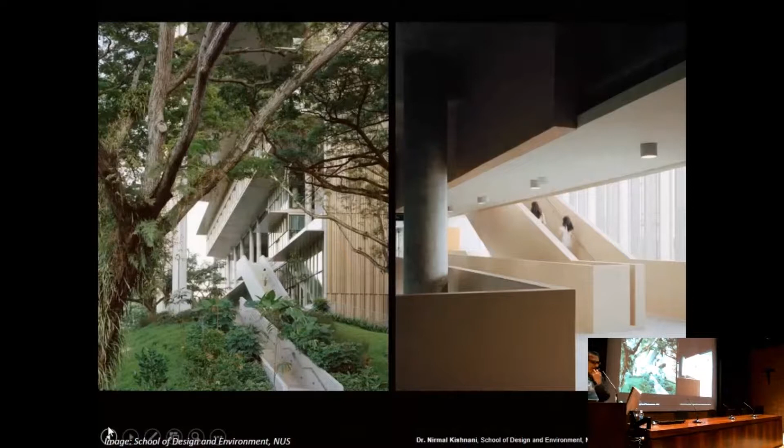There are not many net zero buildings in Asia. There is one other building in Singapore which is net zero, but that building was a retrofit. This was the first new building that was aiming to be net zero.

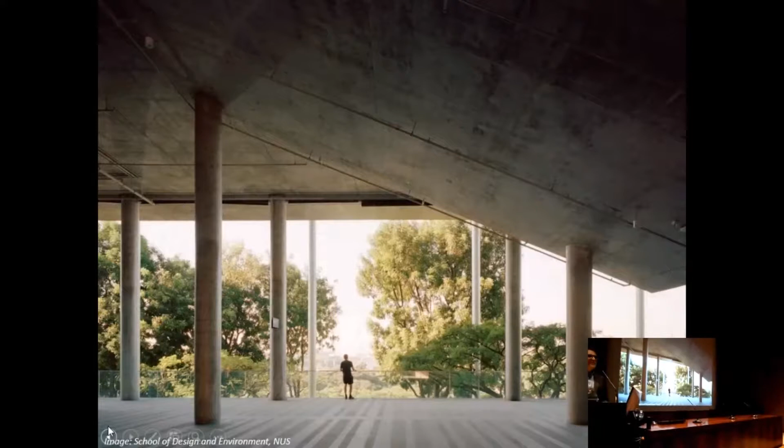If you know the tropical climate, you know a big part of the problem is creating conditions of comfort. In fact, more than 60% of energy used by buildings in the tropics, at least in Singapore and Southeast Asia, goes to air conditioning. So the challenge was how to create comfort without using excessive energy. But the second question was how do we create the energy on site, what technology do we have, and how do we integrate that technology into the architecture of the project?

I have to say I'm very proud of this, not because it's net zero. I think that's a nice thing, but because we were able to achieve something quite remarkable from an architectural standpoint.

I will show you more images as we go along, but here, just to give you context, this is the university campus, the National University of Singapore on the west of Singapore. And there in blue is the School of Design and Environment, and the red block is the new building that we have created.

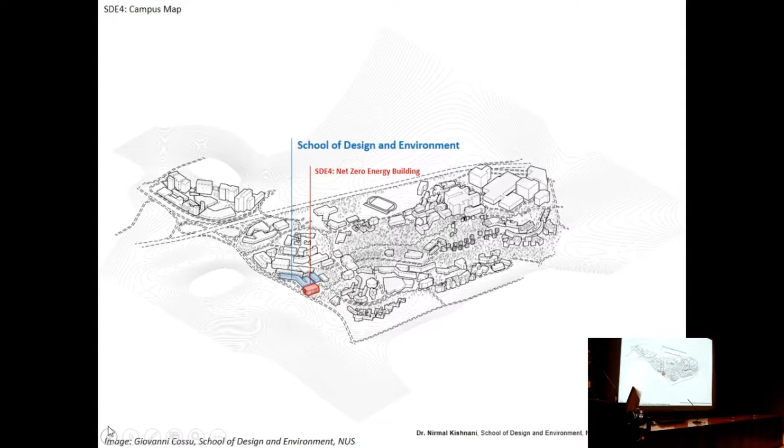I like to joke that nothing frightens a school of architecture more than to ask them to make their own building, because everything that we teach must be in the building. It must represent all our aspirations. So when the project started, it was very stressful because we had to pack a lot into this project.

It had to do many things at many levels. I think this is what made it so complex, because we wanted it to be zero energy, but we also wanted it to be beautiful and comfortable and inclusive and biophilic. All of these things that we teach in the School of Architecture, we needed to represent in this project.

So here is a very quick summary. It's not a very big building, about 8,500 square meters on 6 levels, and most of it is architectural studios, design studios, laboratories, some classrooms, and a lot of social space.

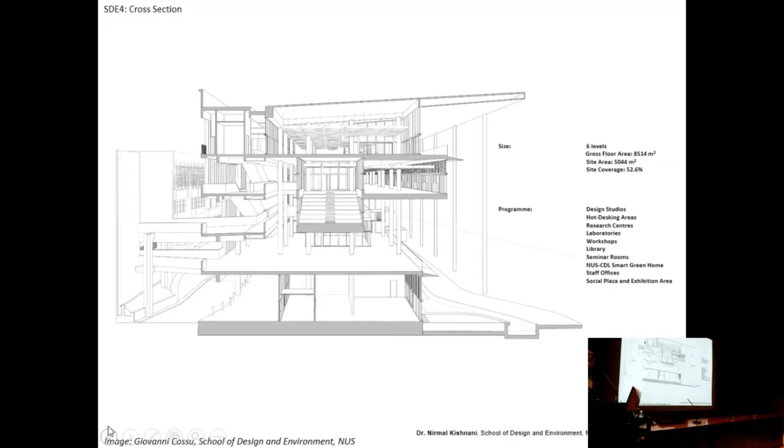I hope you will bear with me, because I have a short video, and sometimes I think it's better to see it in video than me just talking about it with images. So I will run a very short video on the completion of the building. This was used when we launched the project.

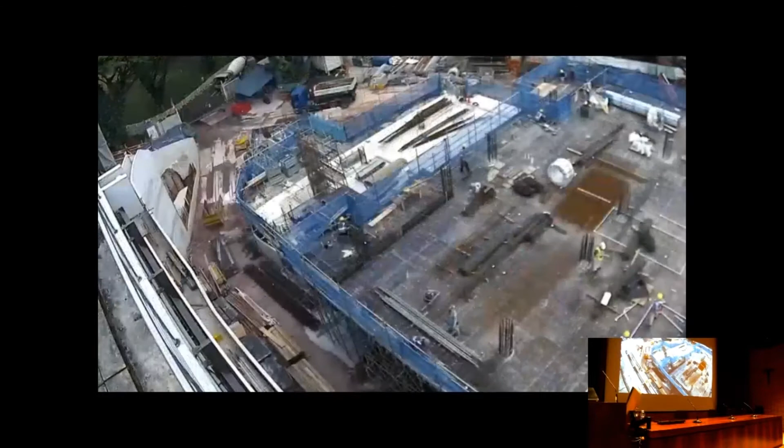I think as an academic institution, and particularly in the School of Design and Environment, it is really incumbent on us to walk the talk. We need to continuously position ourselves in advance of the current state. That's our mission as an institution, to continue to push the frontier, to research and development of even higher ideals and higher aspirations.

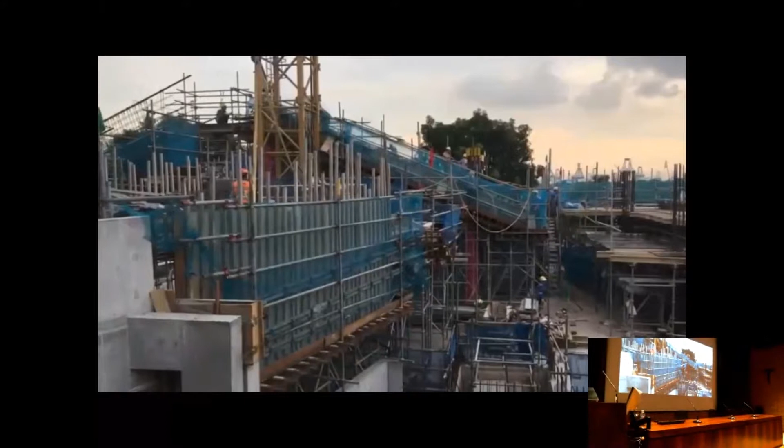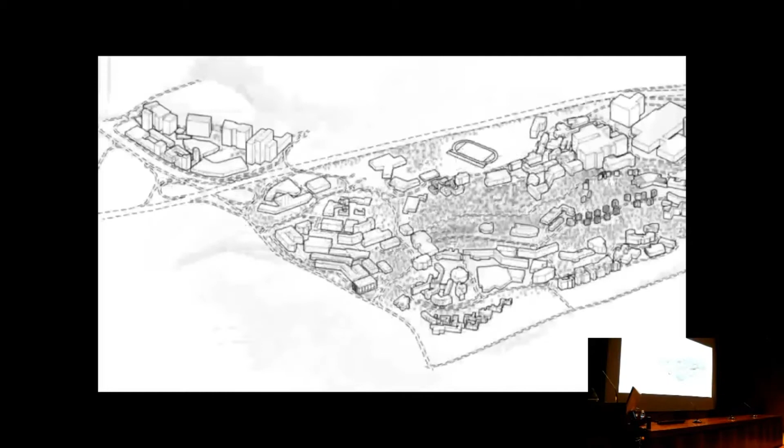In the campus master plans completed in 2008 and 2012, the then President decided that each faculty should have a new flagship building that will inspire the occupants to continue to excel in teaching and research activities in an increasingly competitive academic landscape.

We needed a building that would encapsulate the challenges of our time. Sustainability had become an important part of what we teach. The architecture of the school needed to match the pedagogy of the school. If this was done right, it would not only add credibility to what we teach, it would allow the use of the building as a teaching aid and research scaffold.

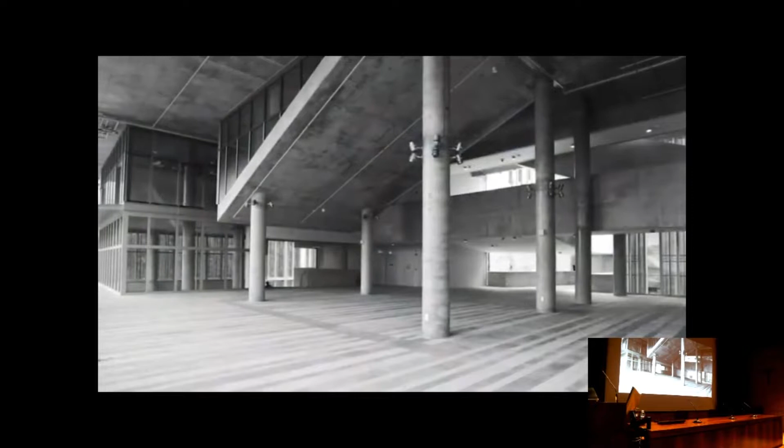The values of SDE are twofold. One, for SDE itself as an educational institution, is really to set a precedent, an aspiration for all of our students in terms of performance, but also architectural formal clarity. This sets a tone in which we as educators teach our students, and it becomes a way of showing immediately to our students the values that we have as a school.

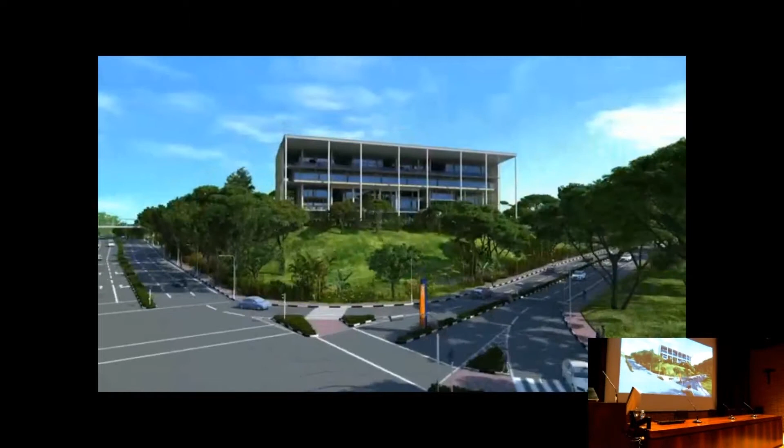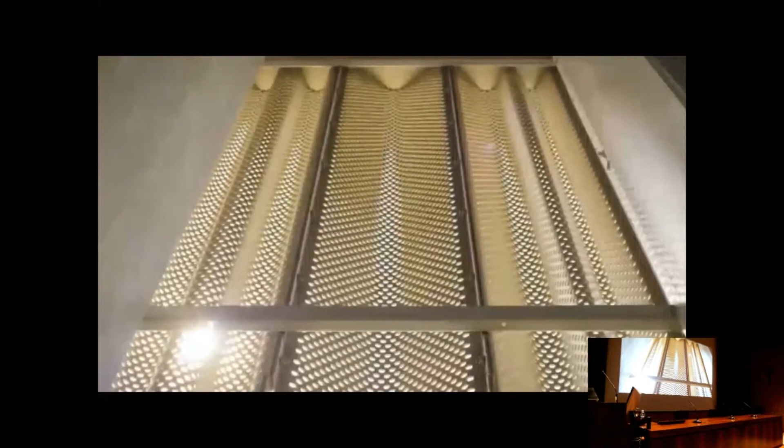First of all, having a building that looks very tropical, I think it will make a very handsome entrance building to the university. All this will be achieved with good architecture without compromising the sense of space, the beautiful proportions, the combination, the articulation of the materials, the details. Different spaces have a certain informality and generosity that the spaces provide.

So there's a lot of breakout space, interpenetration of workspace as well as collaborative space, learning space, and research space, so that it cultivates a sense of collaborative work or collaborative learning within students. The veracity of this parti, I think, is pretty fantastic. The south elevation is framed by a colonnade that supports the large PV panel above, and in a way it really speaks to the kind of amazing integration between the natural environment, the outdoor climate, and interior spaces.

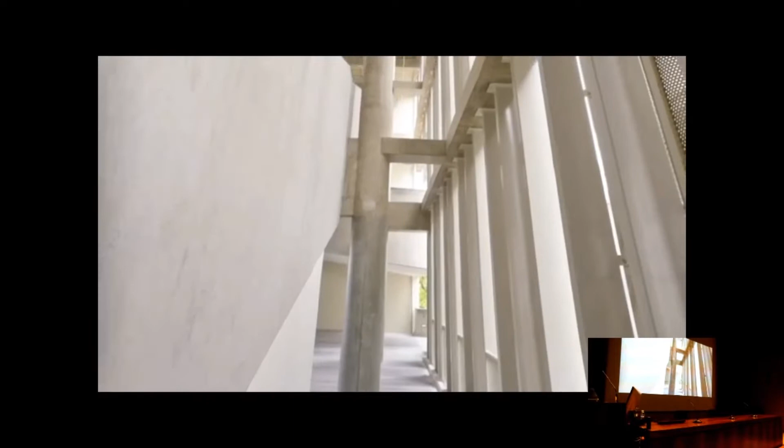This project has preserved a sense of lightness and space, and interestingly, this ambiguity between the indoor and outdoor space was even visible during construction, for example, in the way the building structure and scaffolding encapsulated the existing trees.

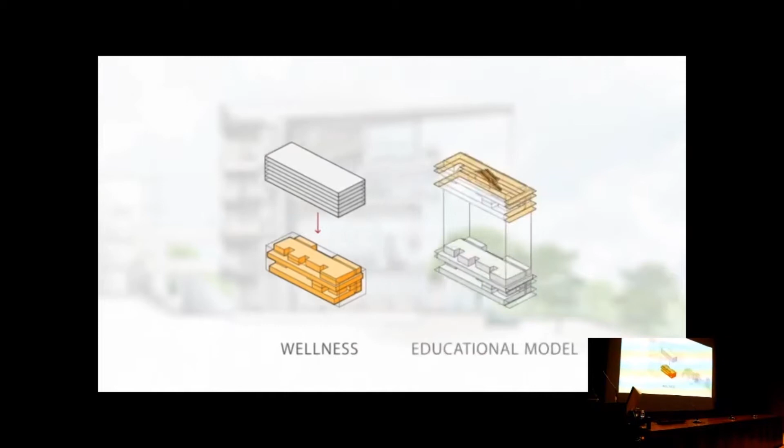In architecture, the building is only as good as the client as well as the architect. So both had to be pushed by the brief, in which the vision was very clear—to look at environmental performance and environmental sustainability in a very serious way. I think the coupling of a clear vision and technical performance really paved

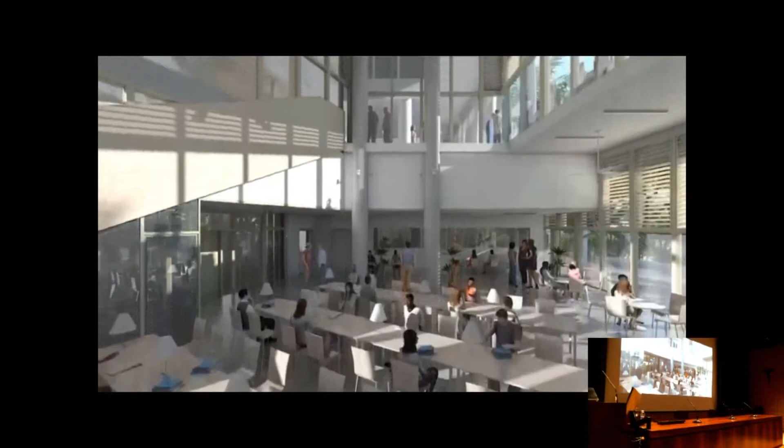the way and guided our architectural response in a very productive way. This building is going to be very different from the rest of the buildings in NUS—a different type of mechanical system, ceiling fans, and the way the building operates will be very different. We will have to engage a lot of training for the users to educate them on how to use the systems and the building.

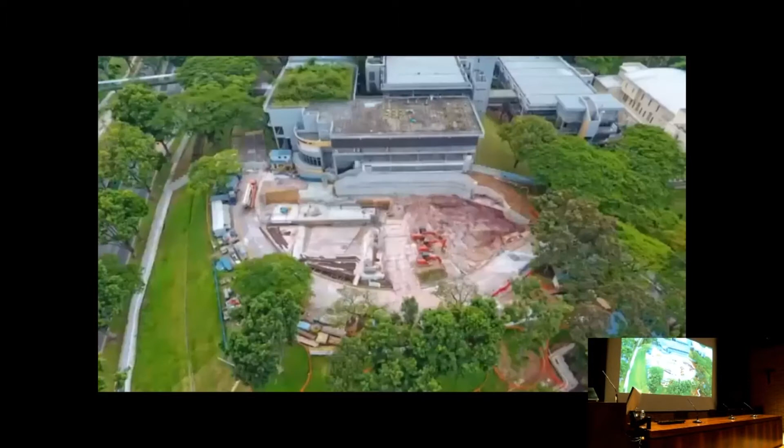SDE4, in fact, being a net zero energy building, is attracting a lot of attention. It's a showcase for NUS. After the project completed, a lot of agencies and other institutions wanted to learn from NUS how we really achieve a net zero energy building.

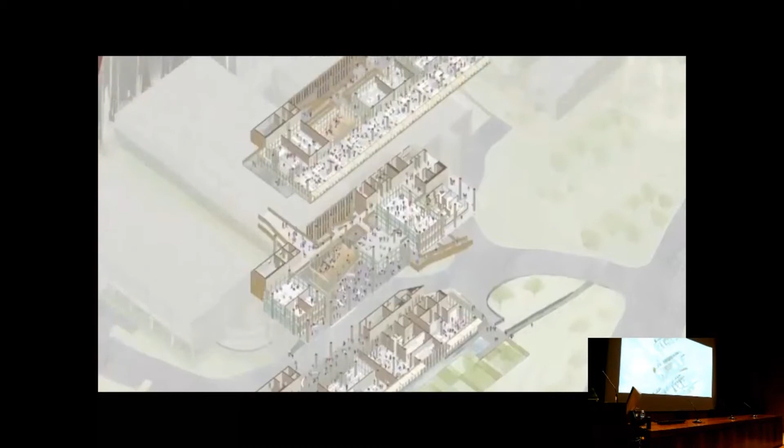To design a net zero energy building is particularly interesting for me, but in particular for Singapore and for the School of Design, I think it's key. There's a generation of students going through this school in the next 25 years, and this is where we will learn. If this building can teach just a small group of people how to help out in the environmental aspect, and they disseminate that down to the people at large, back home and back to society, then SDE4 is a fantastic building to start with.

I think it also reflects what we have learned as a team along the way. One of the key learning points would be that of sharing knowledge and developing a pragmatic understanding of design principles and systems across disciplines.

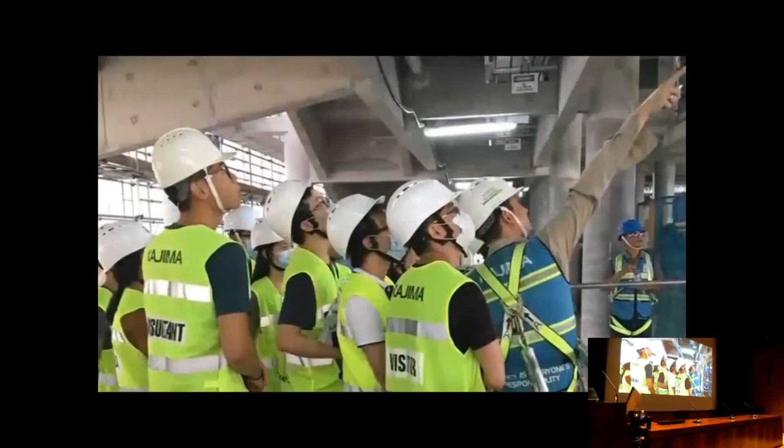But the project went even beyond this target, looking at opportunities for pedagogy. This whole idea of integrating design, construction, teaching, and research was translated, for example, in seminars, workshops, and site visits with SDE students and staff, and even in signing a memorandum of understanding with SDE partners, and introductory sessions with delegations and embassies. The entire process became pedagogical.

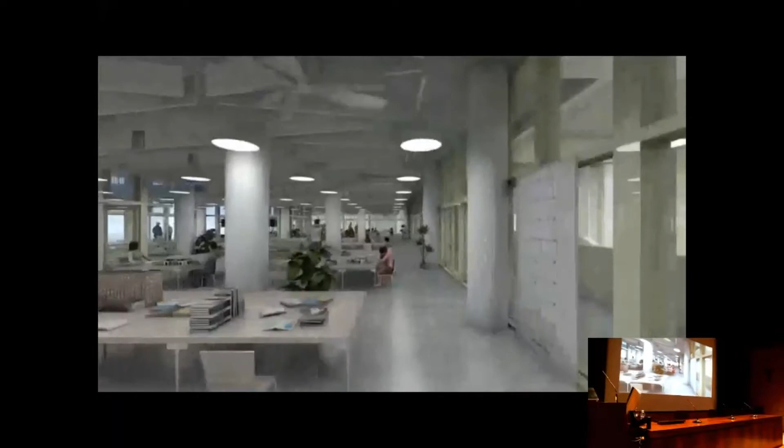All this was a very clear and important message, particularly for our School of Design and Environment. That's why we are doing what we're doing—so that students get the opportunity to experience firsthand what it is like to engage in such a process: to design, develop, construct, and operate a state-of-the-art building that supports wellness and green living. At the same time, they themselves must also be influenced to adapt their own behavior in living inside such a building.

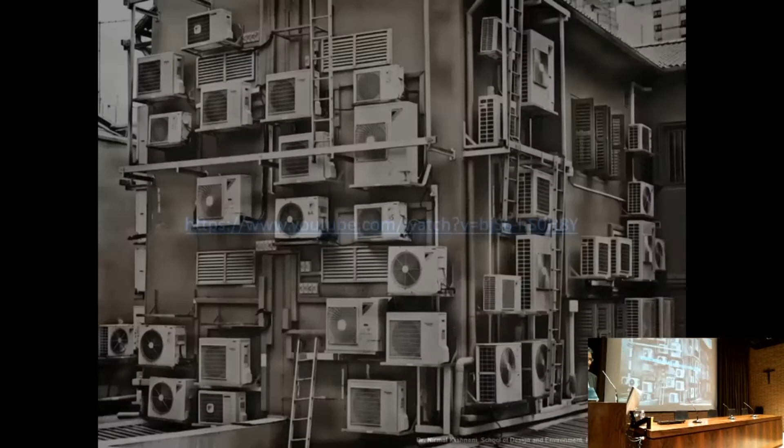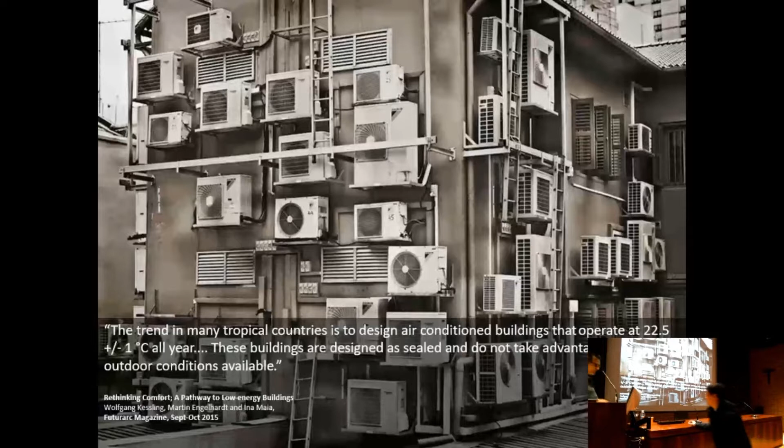I apologize for the PR. It sounds like... I think I'll get the video. Sorry, I think it's running. That has nothing to do with the new building.

The video was produced as a way of promoting the ideas of the school to audiences. So let me take you through step by step how we got to this project, and it was a very difficult process.

Of course, when you finish a project, you explain it like it was natural—of course we're going to make a net zero building because we are a school. But actually it took a long time, and it was very hard work. The biggest challenge was really redefining comfort and redefining how we function as a school of design. Let me take a little time to walk you through step by step how we got there.

The challenge of the tropics is that we have become addicted to air conditioning. It's not that we cannot function without it, but as a matter of lifestyle choice, we've become so used to it that we don't know how to imagine a world without it. This is a photograph of a beautiful old historical district in Singapore, which if you come to Singapore you must visit, because it's so charming—it's like a precinct of old shop houses.

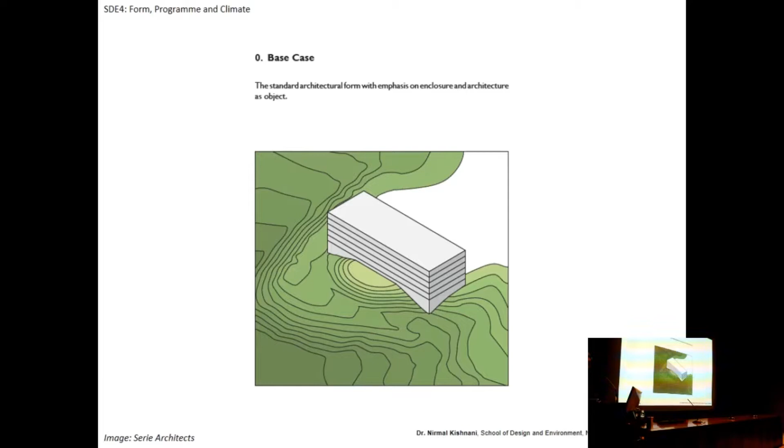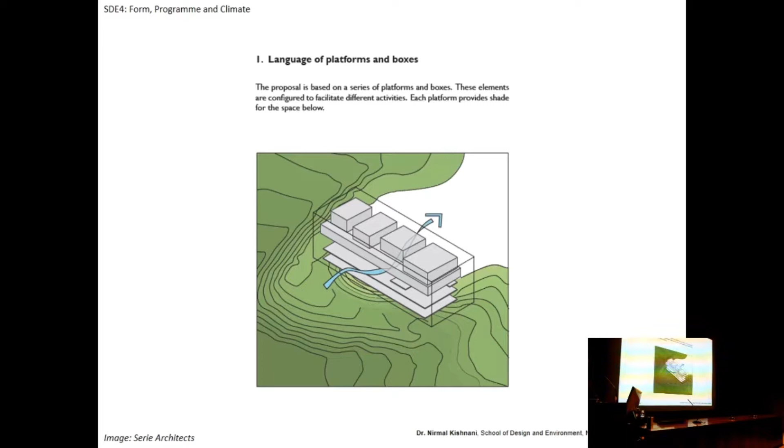They argued that the base case of the building is that it must have the right orientation, but it cannot be a compact solid object which internalizes all its air conditioning systems. It needed porosity. So the architectural language proposed was that of platforms and boxes. The building would function the way it looks: you have these floors, and within that you have boxes, with gaps between them through which air flows. This logic was there from the beginning, and it stayed there.

And Chris, who you saw in the video, he's an excellent designer. I have great respect for him. He was able to hold on to this ideal.

The basic premise is this: you can air condition where it's needed, but in spaces where it's not absolutely needed, perhaps air conditioning is not the answer. So the building is designed as a mix of spaces, those that are climate controlled and those that are naturally ventilated, porous, and connected to the outdoors.

A bit draconian, like okay, now the aircon goes off, open the windows and switch on the fans. You don't have a choice. This is something we have to communicate to the student body and educate them on why it's necessary, because when people believe in the bigger idea of what you're trying to do, they are prepared psychologically to accept certain levels of discomfort, or prepared to accept alternative modes of comfort, meaning they don't demand air conditioning all the time.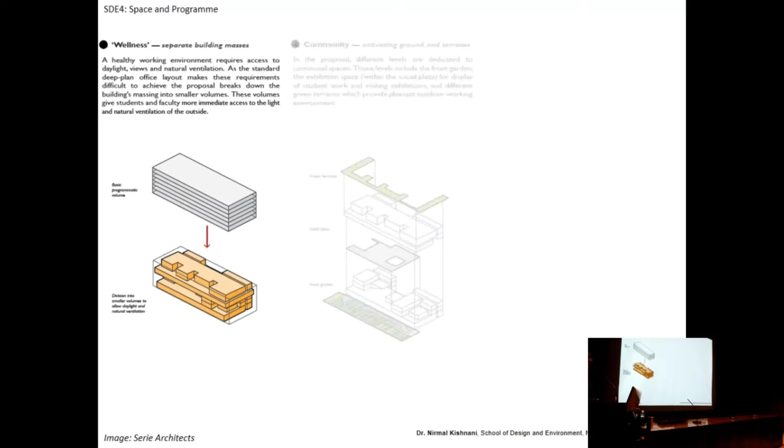But what we decided very early on is that we were going to challenge that. We were not going to fully air condition the building, but also we were going to fragment the form. By fragmenting it, we were able to free the space for natural ventilation and for social space. So the community intention, the idea that a building like this is not simply functional spaces but also spaces where we socially interact with each other, became clear very early at the beginning.

They had to build a scaffold to wrap around the tree so that they could do the construction around it. But these are the kinds of spaces that students will enjoy—spill-out spaces from the studio where they can go out and have their meals.

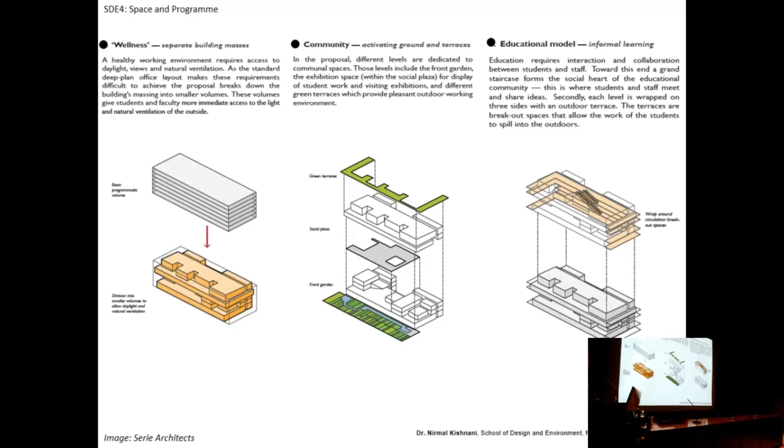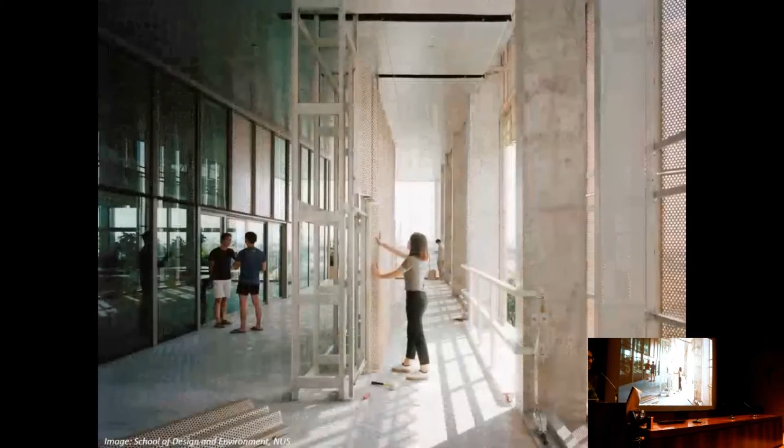Or they can use these spaces for some of the more messy work that architects do, like spraying and so on. Then the second layer of thinking, of space-making, was the space that would create opportunities for learning and research. We knew early on that the building shouldn't just be an object—it should be a scaffold, meaning you should be able to take away things from it and add things to it.

So here you see a part of the facade that is meant to be removed. If you are a researcher working with the School of Design and Environment and you want to study solar panels, new technology, or green facade systems, you can simply take off a part of the wall and attach your research elements there, and get data.

So the idea of a living laboratory was also there from the beginning. It was part of the vision statement that we need to have spaces that teach us not just what to do now, but what to do in the future.

And these spaces also begin to behave socially. So all the corridors and the staircases are exaggerated—they're not just for circulation, but also spaces for students to hang out and interact with each other.

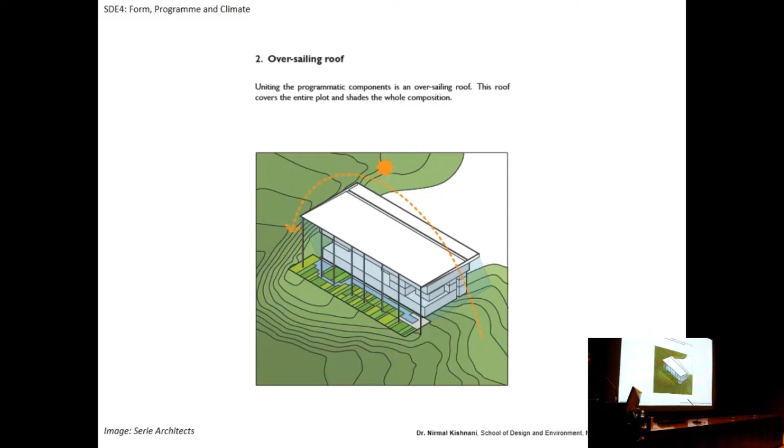The idea of a climatic response found its way into the shape of the roof, and the roof began to act as a canopy that would define the performance of the building.

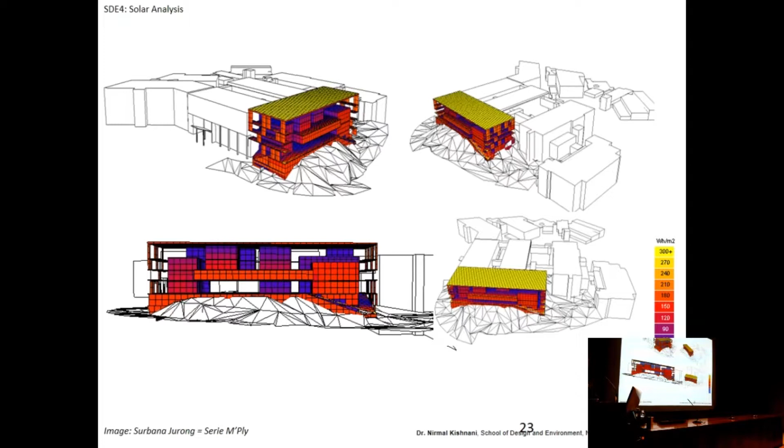Here are some of the early studies done on the facade of the building, before we extended the roof. You can see that the language of solids and voids creates a highly differentiated facade system in terms of solar exposure. This was submitted during the competition, where the architects were already looking at shielding the facade from direct solar radiation and relying on diffuse light.

I want to point out the image on the right that was proposed by the architect at the beginning—it looks like something Le Corbusier would design. It's so minimalist, so clean. The final thing was very different.

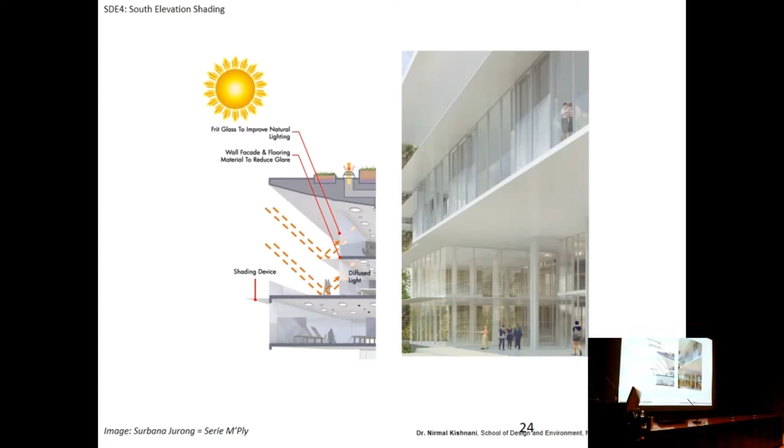It goes through a process where you begin with this idealistic image of what architecture is—no indentation, nothing. Then as you go along and learn from performance modeling, it begins to change, it transforms itself. Here are the south and north facades showing what that exposure looks like.

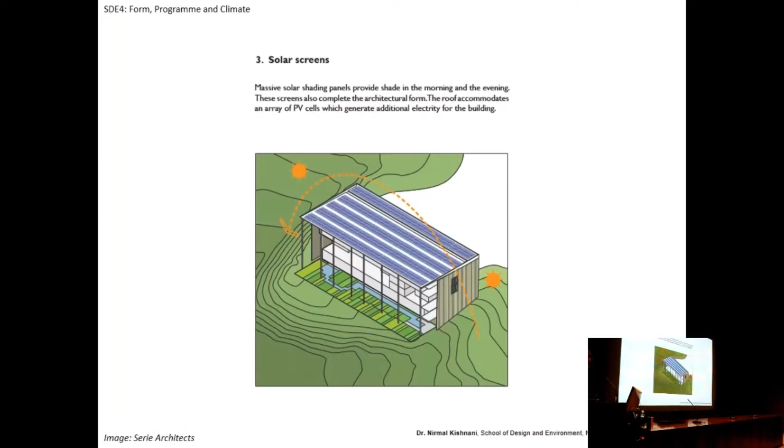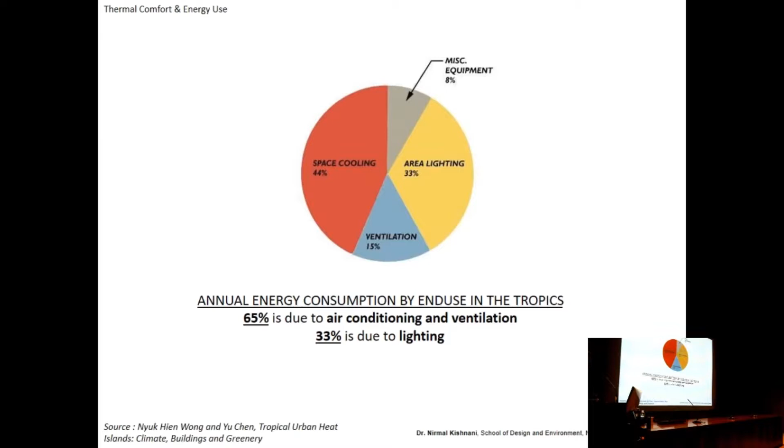And then, of course, we had to protect the east and west facades, made up of solar screens that protect the more exposed facades from sunlight. As I said, in the tropics the big problem is that we consume a lot of energy due to air conditioning, and we knew this would be a problem.

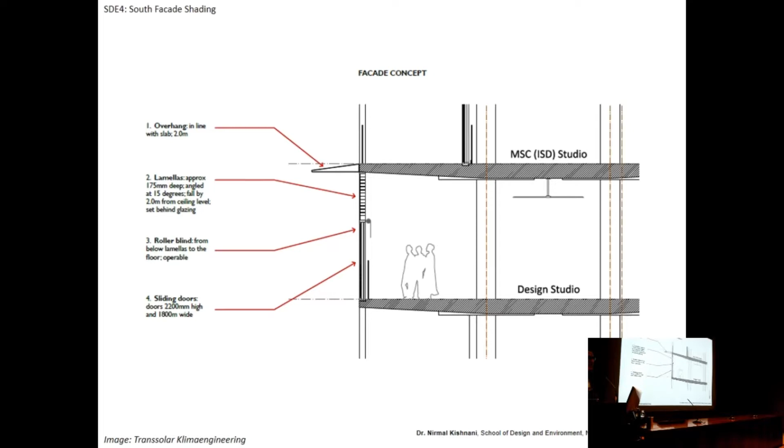Our consultant Wolfgang, from Transsolar, who was in the video, guided us through a series of steps. He said, here we have the reference building—what if we improve the envelope and reduce the solar exposure, what happens to that? Here are some designs produced by Transsolar in detail, both in terms of shading elements and lamellas to bring diffuse light in.

Here are some of the studies they did during the design process. It was a very intense process where we looked at many iterations and options. For example, they showed us for different facade systems—with different overhangs, different types of shading options, different glass properties—what the resulting cooling demand would be.

So they produced a matrix, an iterative study looking at all these different options. Green is good, red is bad, just to give you a quick idea. From this, we began to select both the extent of the overhangs, but also the type of glass and the composition of the facade.

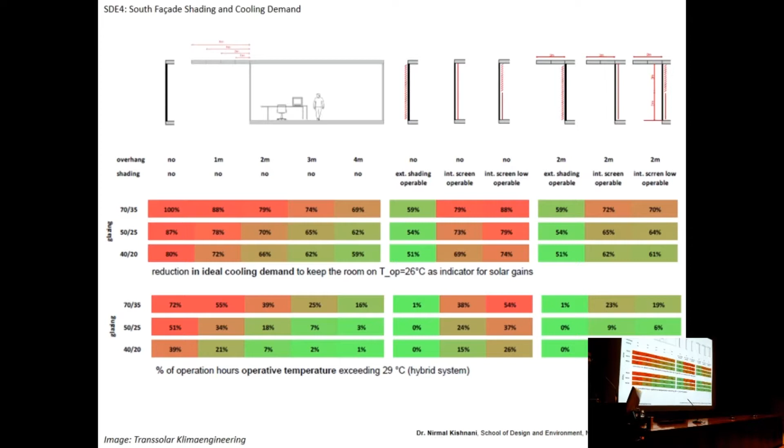So from an initial 100% energy scenario, we found that by using strategic shading systems and glass selection, we were able to reduce that by 25%.

I think it makes it more interesting that the facade tells the story of the climate. When you look at elements of the facade like these fins and lamellas, you begin to understand what the building is doing. The form and the vocabulary of the building is beginning to talk about where it is in the world.

I'm not sure this necessarily says tropical. Chris is a really good architect, but he began the process with a rather temperate idea in mind, a very Corbusian idea of planes and clear full-height glass systems, and that had to be changed.

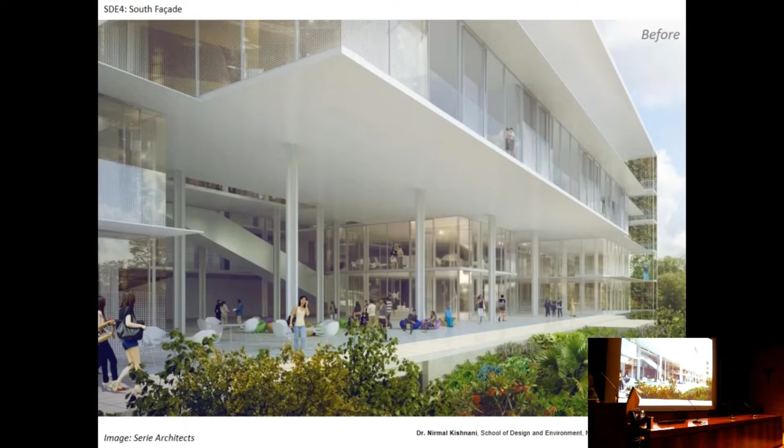And I think to his credit, every time we began to do these performance studies, he began to incorporate it into his thinking, and the architecture became more interesting, not less interesting. He didn't see it as a compromise, he saw it as a way of deepening the connection between building and place. So this is what we got at the end.

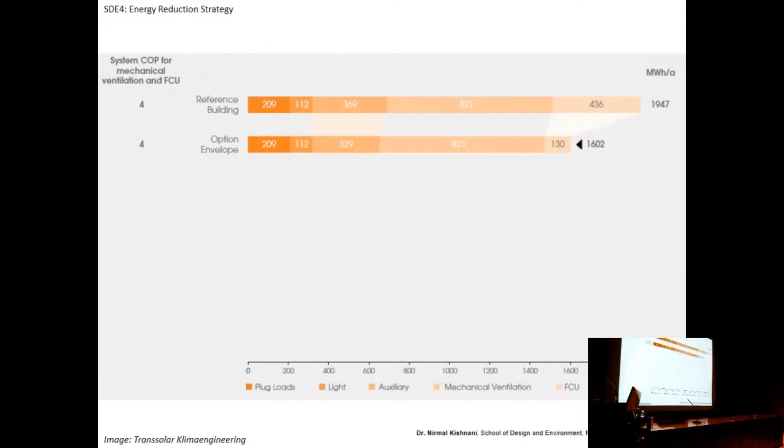And then we said, okay, 75%, still too much. What else can we do? We studied the possibility of using very efficient air conditioning systems. But the other possibility, even deeper than just efficiency of chillers, was what was called the hybrid cooling system. The hybrid cooling system works like this.

Instead of having fully cooled space with 23 degree set points, the cool air supplied is tempered, meaning it's not highly cooled. It brings the air temperature to 27, 26 degrees centigrade. This is combined with ceiling fans, and ceiling fans provide air speeds of between 0.5 to 1 meters per second, with a grid of ceiling fans over the entire space.

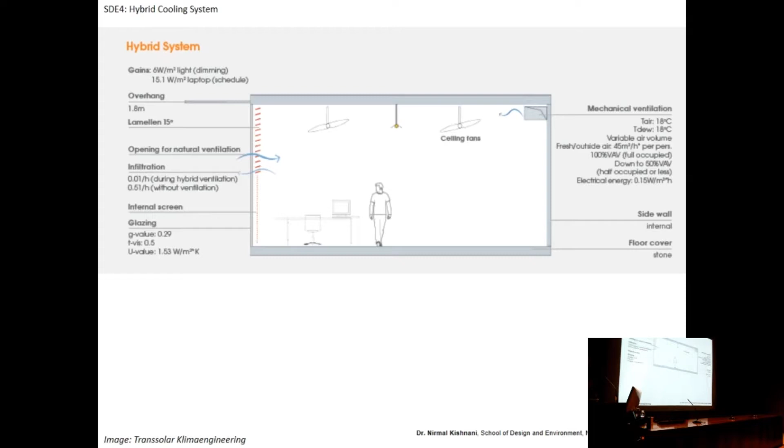So the combination of air movement and cool air provides an operative condition, the thermal sensation you have of about 24, 25 degrees. The theory of thermal comfort is that there are all these variables affecting your sensation, not just air temperature, but humidity, air movement, and also what you wear.

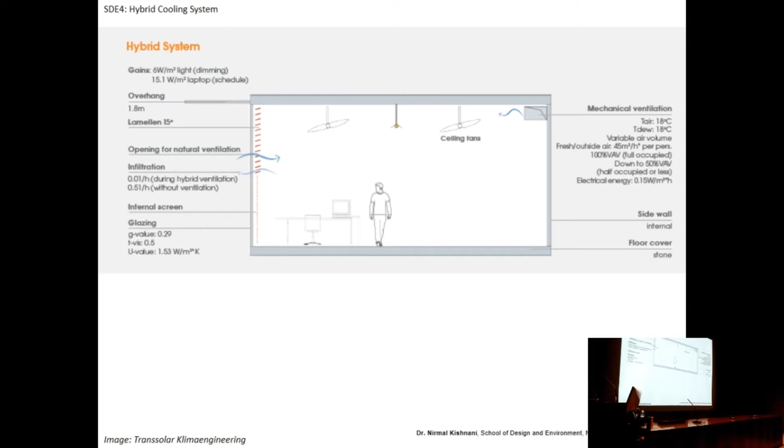So the idea was that we shouldn't burden the air temperature, because that is where all the energy goes. If you make the building work very hard to create 22, 23 degrees centigrade, you're consuming a lot of energy. But if you reduce the demand on cooling and instead compensate with elevated airspeed, a fan costs a fraction of the energy. These fans are really working on very minimal energy, I think a few watts was the efficiency of the fans.

Now this idea that we don't necessarily need full climate control, that we actually want to interact with the building and control our own climate, is referred to as adaptive comfort. This has emerged in the literature, it's been around for a long time. The idea of adaptive cooling was discussed in the 80s and 90s in the theory of thermal comfort. But we began to see interest in this as we explored the reliance on air conditioning.

The thinking is that if you take away full reliance on air conditioning and combine it with ceiling fans, people can actually get up and adjust the fan speed where they are. So you can regulate your comfort at a local level. Whereas air conditioning in a space like this gives you cooling all the way through, front to back, it's the same thing. In theory, yeah, it should be the same.

But with adaptive cooling, a large volume space like this has higher temperatures but a grid of ceiling fans. It becomes possible for the person at the back to turn the fan up and the person in front to turn it down, creating differential conditions. And it makes sense, because we don't all want the same thing all the time.

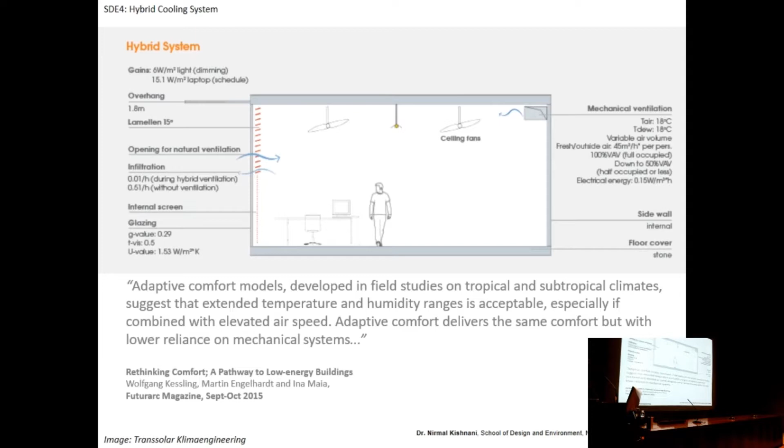And in large spaces like our studios, they're not occupied all the time. Sometimes there's a group of students working here, but the rest of the studio is empty. So it allows the architecture to deal with the variance of human loads and the difference of human expectations. With that hybrid cooling system, we were able to bring the energy demand down to 50% of the base case. Still too big, yeah.

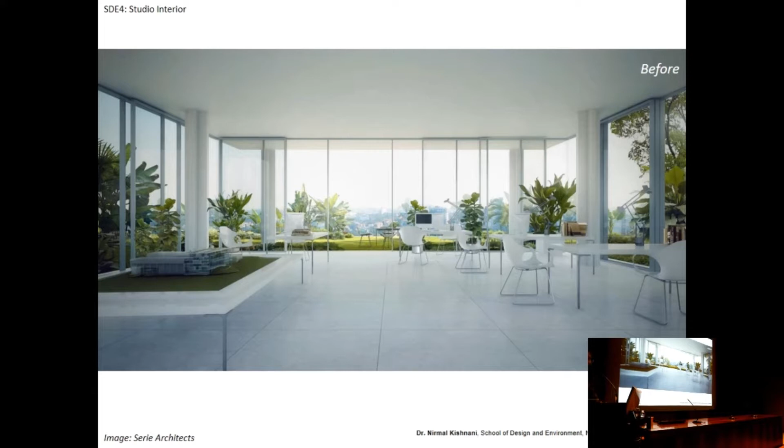So the question was, what else can we do? Here is Chris's drawing at the competition stage. This is what I mean about Le Corbusier—he's got this kind of hyper-modern, minimalist idea of what the interior would look like. And this is what it eventually looked like. I think it's better. For me, it feels like you're in a tropical condition. You feel that the envelope is doing something, the fans and the ceilings are doing something, as opposed to this kind of raw minimalism.

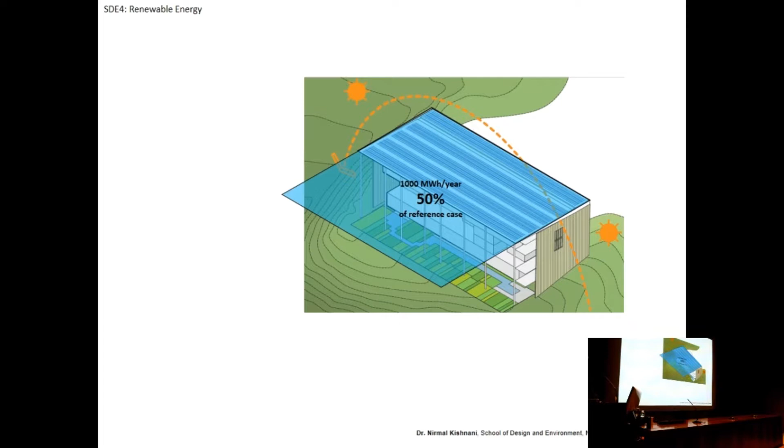Anyway, the second thing that we targeted was the question of human consumption—what kind of laptop do you use, what kind of printers do we have. So the rule, and this is where it becomes a question of managing behavior, because it's not just about what the building does, but what we bring into the building. The rule was that we would all be using very efficient equipment. Nobody was allowed to charge their phones, for example—you do that at home. But printers, copiers, laptops, no desktops, everybody has to work with plug loads that are as low as possible. And that, we found, brought it down to 25%.

Now the roof fit the building. Wolfgang was very good because he started by saying to us, if you want a zero energy building, it's very simple. You calculate the size of the roof, you calculate how much energy that produces, and that is your budget. It's like having a financial budget—it's like saying I have $12 million, that's how much money you have. It's a question of how you use that money, right? Same principle applies to energy. He would say, this is the size of roof you have, this is how much energy you have. Now, what do you want to do with it?

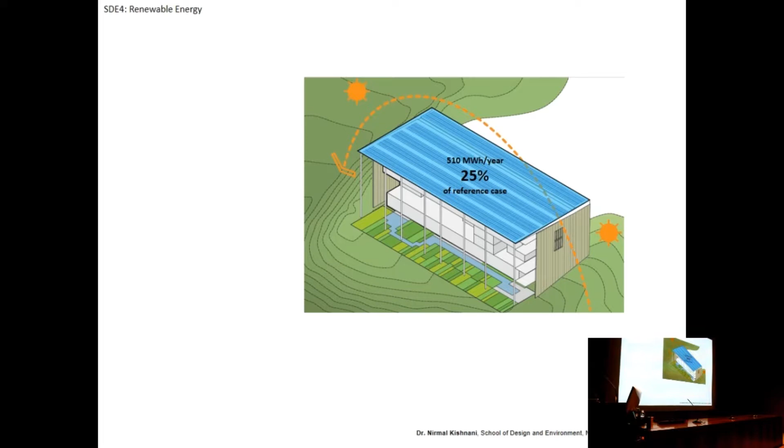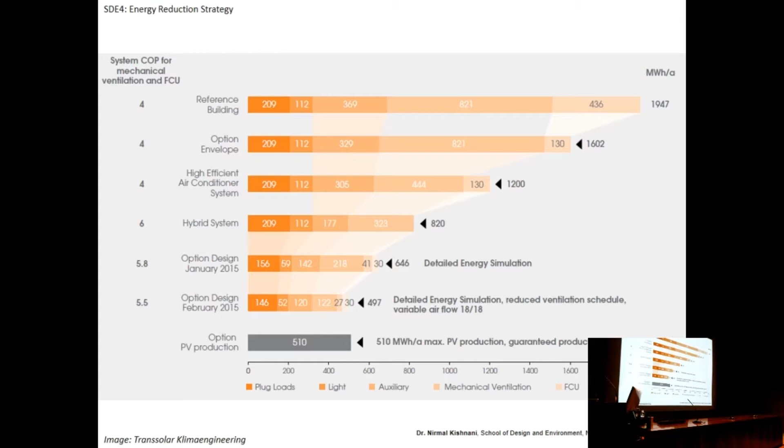And the final thing that came into the picture was the solar PV. We were very lucky because the cost of solar PV, while we were deciding how this building would be designed, came down to a point where it became more affordable. And also, we were able to get the highest efficiency products available on the market today, and that went into the roof of the building.

I like to tell the story of how people think that the building began with this big roof. Actually, it did not. In the beginning, the roof was the same size as the building—there was no cantilever, there was no overhang. But we tried and tried and tried, and we could not get to zero. So then we had to make a decision.

Either we make the roof bigger to accommodate our energy needs, or we put solar energy on the facade. Now you can put solar PVs on the facade, but 1 square meter on the roof produces the same amount of energy as 5 square meters on the facade, because you get less energy out of the facade—its orientation and exposure is limited, so it's a 1:5 ratio. So if we decided to put solar PV on the facade, we would need a lot more solar PV. In the end, and this is a cost calculation, it was cheaper to build a bigger roof.

Now I have to give Chris credit, because many architects would say, oh no, this is so different from what I started designing with—they would fight it. But he was able, with the colonnade, to create an architectural expression that felt almost natural. When you look at the building and you see that big canopy roof with the promenade in front of it, it feels very tropical, it feels very natural. And so the architecture evolved as we went through the process.

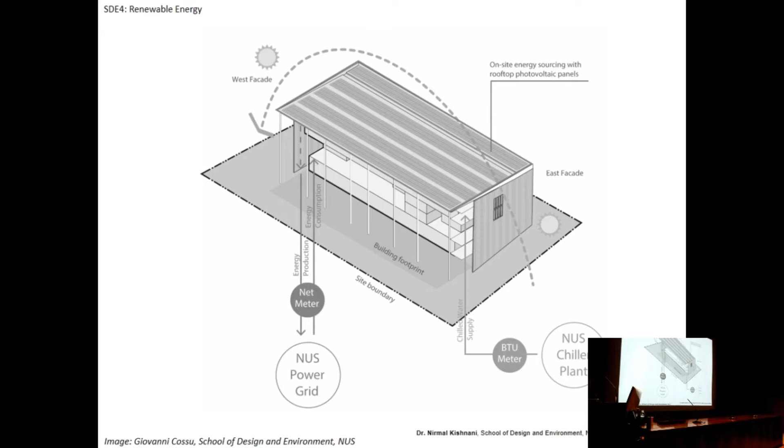Of course, the key to this is that you have to plug into the grid, because solar energy is volatile—there are days when you have too much and there are days when you have too little. And so you rely on the grid, there's a microgrid at the university, and sometimes you put in the extra, sometimes you take out the deficit. And that's how we arrived at the zero.

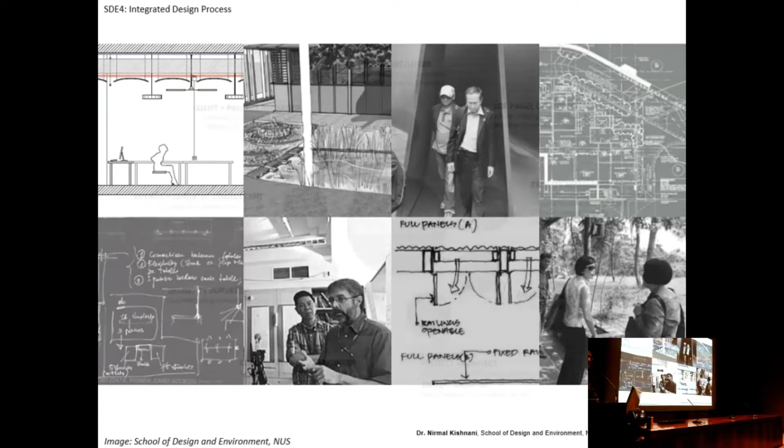I think one of the most important things about the project was the process. I can't emphasize this enough, because we tend to believe that if we just have the right strategy or the right technology, we can get to zero easily. But the experience on this project was that the project team, the architects, the engineers, the quantity surveyors, the project managers, everybody involved had to relearn what they knew or thought they knew.

We went through a very difficult design process, one in which we had to break down our assumptions. I'm not sure how many of you are practicing architects or have been in practice before, but when you begin a project, the engineer will say, give me the drawings, give me the floor plans, and then they will go and put the air conditioning systems over it, buying what's available in the market, so it becomes a kind of collage thing. You couldn't do that. We had to rethink it fundamentally.

The hybrid cooling system would not have emerged if we had to do it in the usual way, because nobody would have arrived at that. We would have all gone to look at brochures and said, here is an efficient chiller, or here is an efficient air handling system. We had to go back to fundamental principles. And that is painful.

Painful, especially if you've been in practice for a while. And painful also because you really feel very vulnerable, very exposed. Meaning to say, as an architect, as an engineer, you have to be open to what other people think of what you're doing. It makes you feel very insecure, because an engineer can say to an architect, your idea is terrible, it doesn't work.

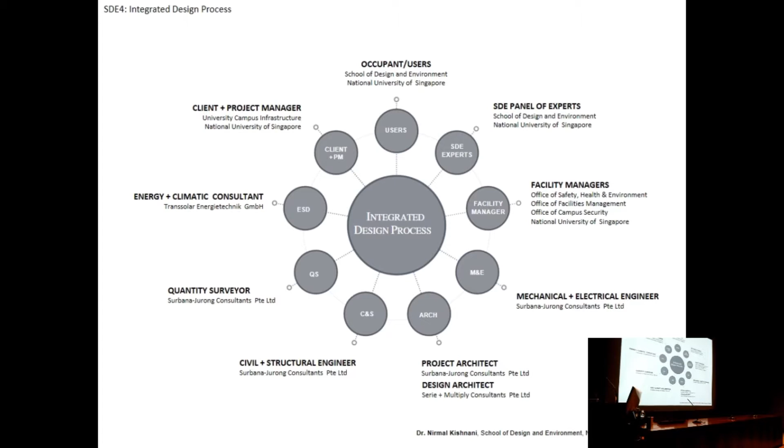So what should have been a 2-year process took 3 years. Actually, I should say the design process should have been 1 year long, but it took 2 years.

During that process, we went through a whole series of iterative charrettes. A charrette is basically a meeting, like a project meeting, where everybody involved in the project comes together. We sit around a table, 50 of us, discussing ideas, evaluating solutions, developing criteria, and looking at how far we are from the target we set ourselves.

So it was not easy to do that, but it was so necessary, because without this kind of consensus, without this investment of our professional pride, it was impossible to do this. Everybody was pulling in the opposite direction.

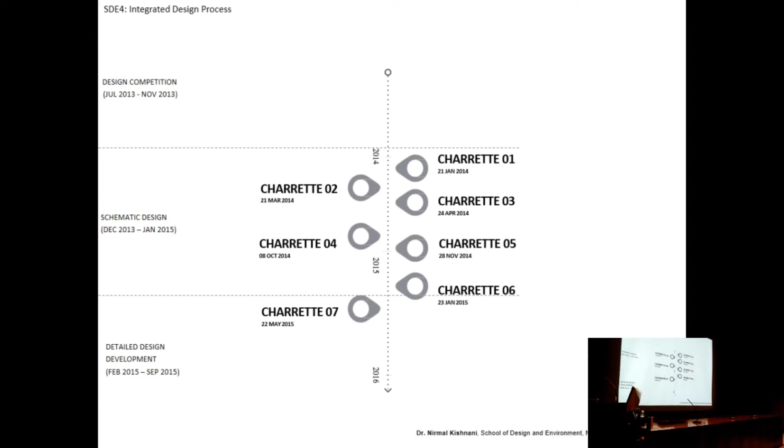So my feeling is that the hardest thing about high performance buildings is people. People get in the way of making green or sustainable architecture. We have to retrain the human element. We have to teach architects and engineers new ways of thinking and working together, because without that, all the technology and all the ideas in the world will not get you very far.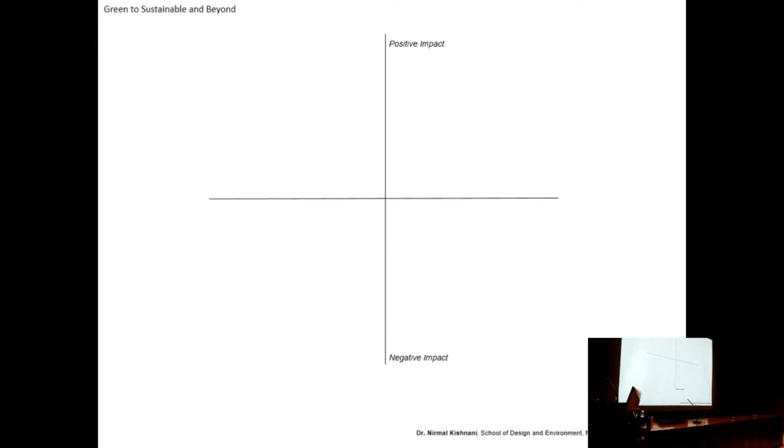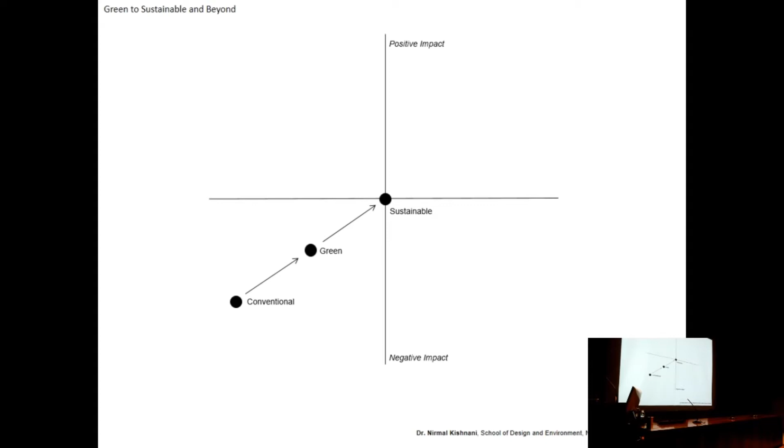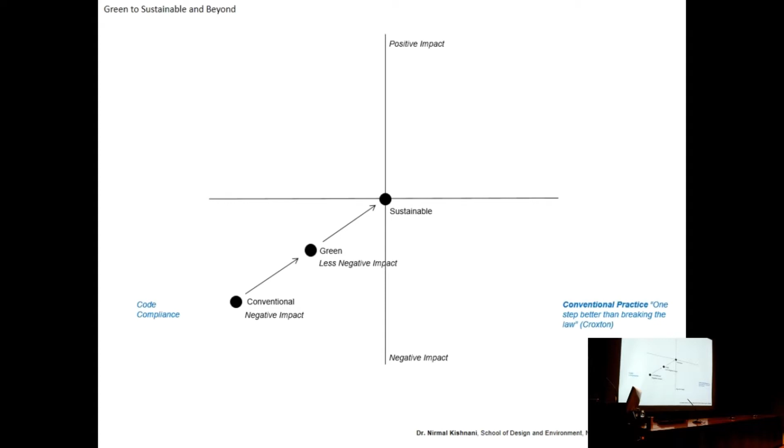I want to summarize the story of this building by showing you a little bit of the big picture. In the discussion today, we are talking about this trajectory. That is to say, we are moving from negative impact, which really is buildings that are code compliant and represent conventional practice, towards what we call less negative impact. And here we see a lot of green buildings in the world.

Now, green defined in a very limited way. For example, LEED certified is green. In Singapore, we have Green Mark, which is a green certification system like LEED. So when we talk about green, we typically mean that this building is less negative than a conventional building.

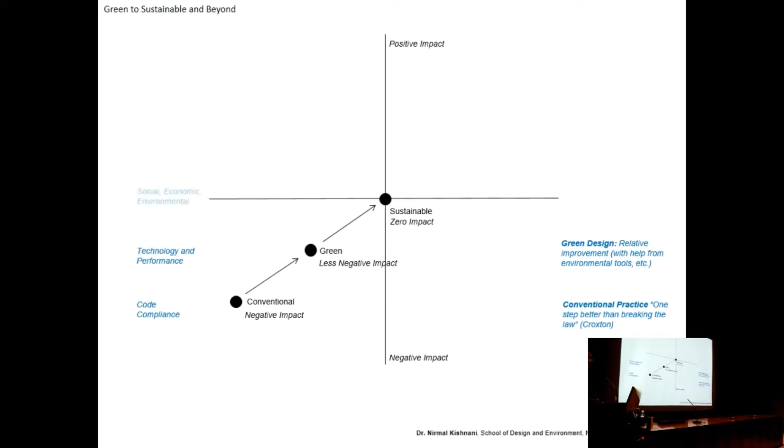It's not zero impact, it's just less bad. Now we are, of course, talking about zero impact. And the idea of sustainability is that we can actually reduce our impact to the minimal or to zero.

Now, the SDE building that I showed you, it doesn't do everything, but in terms of energy, it is zero. So here we begin to discuss what that zero looks like. If we want to get to zero, what are the things we need to do, and what does that do to architecture? How does it transform architectural thinking?

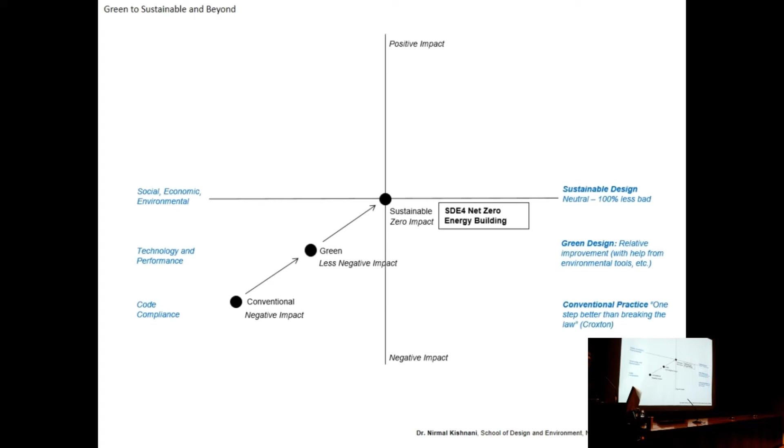But I think that's not enough. I think that if we look at where we are in terms of environmental degradation or climate change, it's no longer enough to just be zero. We have to look for something more than that. And this is the topic of my book: buildings that are regenerative, buildings that are net positive.

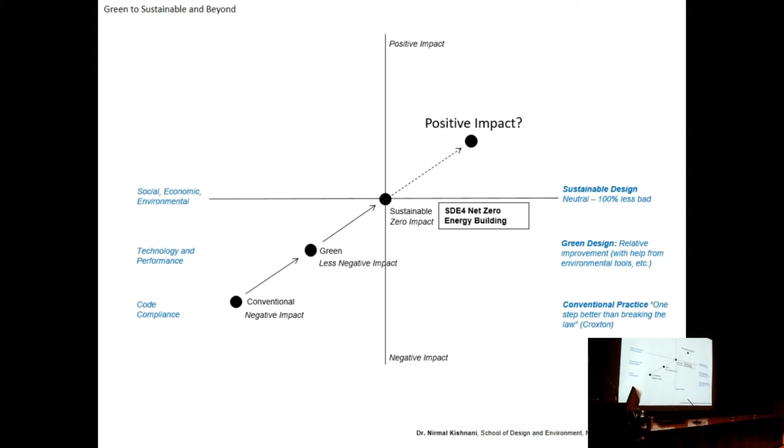I'm exploring this idea in the Asian context, but it's not limited to Asia. There are many, many places in the world where the same discussion is taking place, which is how do we make buildings not just do less harm, but do good? What is good? What do we define by good? How do we measure good? In what ways do we bring goodness back into our architecture and our cities?

As the famous architectural historian Peter Buchanan said, the big critique of sustainability is its failure to describe what constitutes the good life. Sustainability is not just the objective and the technical, it must include the cultural, how we reconnect with self, others, and the planet.

So the problem that we've had in the discussion on sustainability is that we're always talking about how to do less harm. But at some point, if we are going to persuade millions of people around the world to become sustainable, we also have to describe a better life. We have to describe a better way of doing things, not just a less worse way of doing things.

I think it's a very important subject of how we repair cities. I think it's one thing to talk about green and sustainable as an act of mitigation, of doing less harm. But we have to find a way to go beyond that. And we have to find a way to bring nature into the discussion.

Because until we begin to realize that the real problem is not the efficiency of the building or LEED certification or whether we have a green label—the real problem is that we are disconnected from nature. We have found a way to design as if we are separate from nature, and that's not going to work in the long term. So, any thoughts, any questions, any comments?